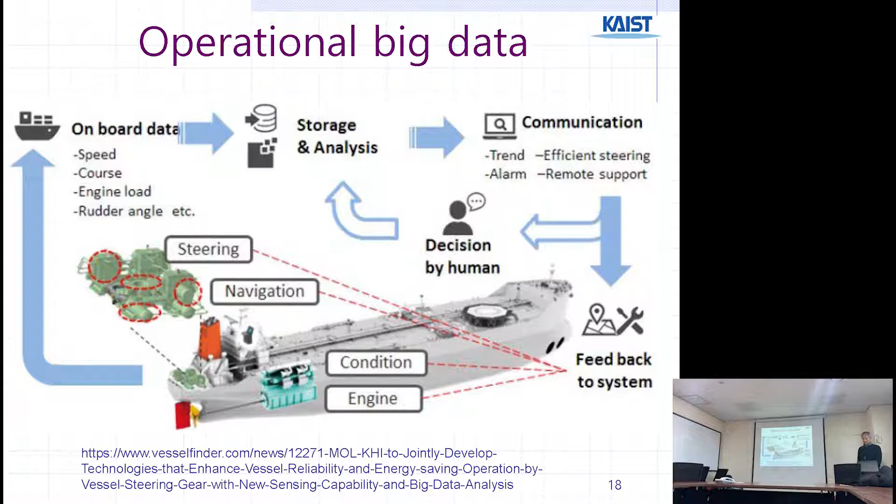You can do your own analysis there. So we call this operational big data, and it's important that you collect this. The technology behind this is sensors. Sensors detect information from the operating devices, and then it is converted into a digital signal and sent through the internet, wireless internet. That is the key component now.

Before, say, 30 years ago, there was no such device. There were analog devices, and for 100 years information was there, sensors were also there, but it was not converted into digital. The other new things are applications based on this big data. We call this edge computing and edge analytics.

Questions? No questions.

All right, moving on to the main topic, modular products. Take air conditioning, the air conditioner. This part is the indoor module, indoor. This is the outdoor module. But this should be one package, one manufacturing product coming from LG Electronics probably, or GE, I don't know. But it's a natural separation of modules, a natural separation of modules.

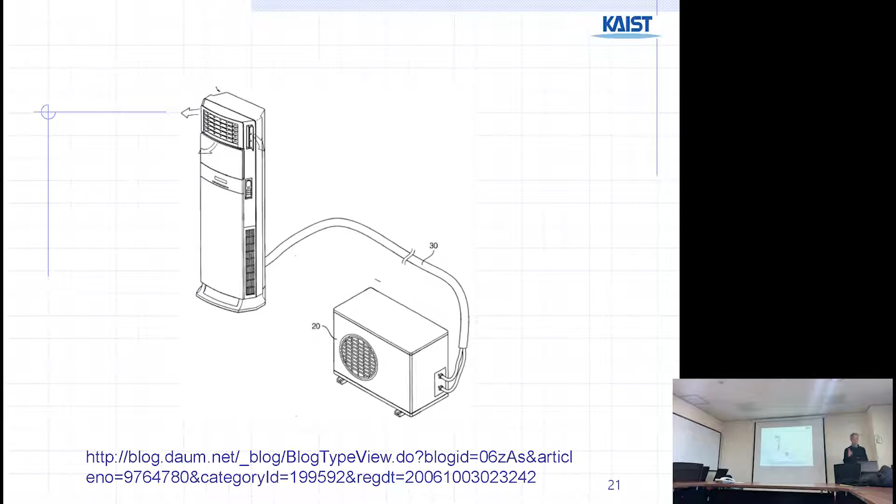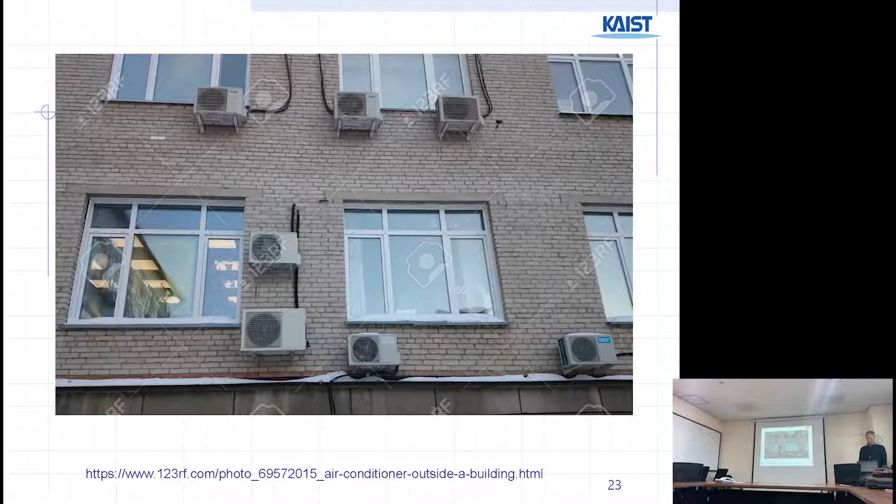Air conditioning, many. When I was traveling in Hong Kong, old buildings, all rooms have their own outdoor modules, very similar to this. Very interesting to me, because Hong Kong is a hot place. Old buildings don't have embedded modules. For modern apartments, you don't see such things, because they want hiding and a bigger integrated outdoor module. But in old buildings, it is installed later after the building is constructed.

So, a modular product. In LG Electronics, they are proud of their modular washer system. And I found most of the big product manufacturers, big products including car, ship, nuclear plant, airplane, construction industry, and even the software industry are using a modular concept. I myself am working on standards, ISO standards, and we are also talking about modular standards. So modular is popular, modular is popular.

Now, I explained about personalized production, not mass production, personalized production. And I also talked about smart service. What can be the relationship with the modular product? Modular product and personalized production, is it good or bad? Is the modular concept good for personalized production and also good for smart service, or bad for them? Probably because they are moving on to modular business, they are probably supporting this concept.

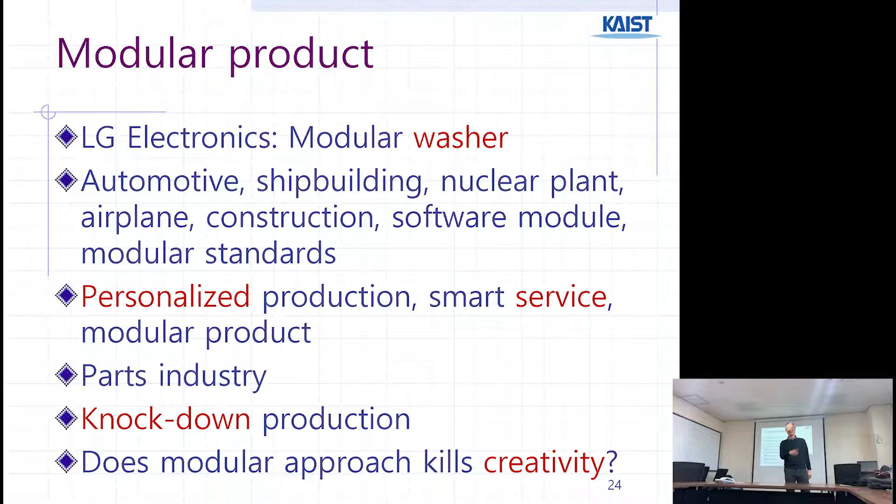Okay, let's see. Sorry, this is in Korean, but I'll explain in translation. This is the traditional way. So parts 400, parts 500, parts 300 gives you model A, model B, model C. Model A has 400 parts, model B has 500 parts, model C has 300 parts. So then you need to purchase all of them and also maintain them, storage and inside. Right? So it is the old way.

But now they have only 20 different modules. Combining them, module 4 gives you model AA, module 5, a combination of 5 modules gives you model BB, and a combination of 4 is model CC. And the purchasing department, quality control department - here they have more than 1,000 parts, here only 20 modules.

And then also you can provide more variations than this one. You can do it here, but you cannot do it because of this back end, right? Designers can do more variation, but it cannot actually be produced because it cannot be handled, supported by the purchasing and by the quality and others.

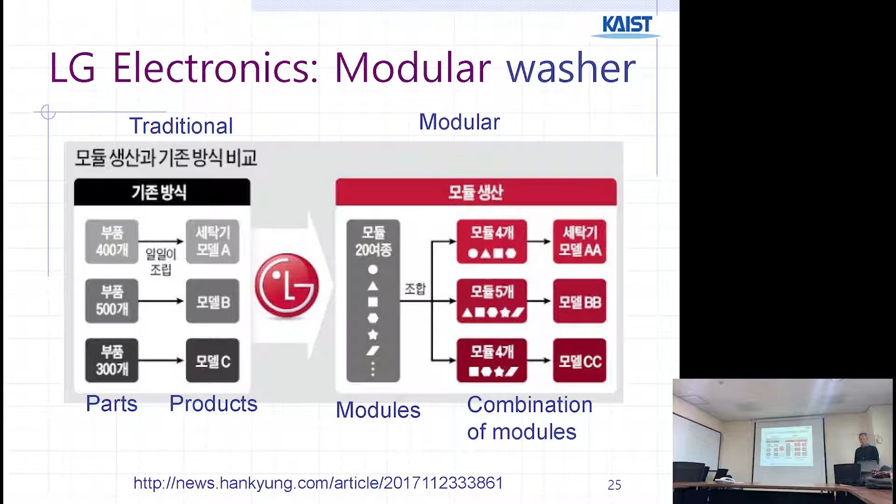And then also inside the modular architecture, the baseline most important module is the power module. It gives you more endurance and power, and problems come from here, right? This is the most important module. And they have only one kind of module among 20 - it is the most important one. They put many of, or half of, their engineering power into this module development. So it takes a long time to develop a new power module. It takes a lot of money to develop a power module. But customers do not rely on this power. They don't know.

Maybe they know there is a break, it doesn't work, and sometimes it is a problem, right? See, the appearance module is many, right? And functional means you have buttons, how many buttons, how many spins, or this is functional. So it is shown to the customer. So they select from using this and gives you 8, 6, 48.

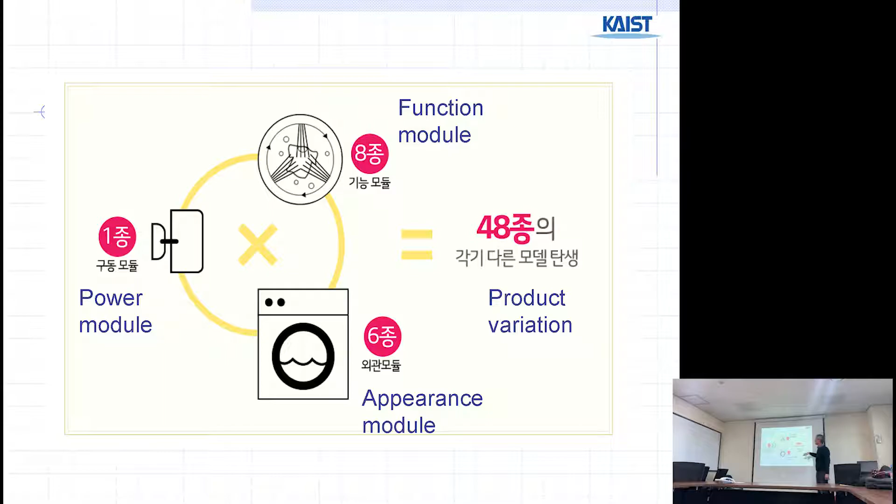This is a real number coming from LG Electronics washer. Right? So they separate out the marketing module from the engineering module. Right? And then what is good? You can produce this baseline module many. If you sell 1 million washers per year, if LG Electronics, then you can produce 1 million power module, same module. So you can achieve economy of scale, the money, and also in terms of quality, high level quality. Right? And this one is good for customers. Right? So that is the idea.

Automotive modules. Also, see, seat is important for customers, right? Leather or fabric, color, right? And inclined or warming, many, right? Many variations, right? But engine, brake system, you don't know.

I don't know about the brake system. When you purchase your car, you don't worry about the brake system, right? But it is important, right? Very important. But customers do not rely on braking. They do not check the brake system, right? So we call this a baseline power module, right? Power module, and then additional appearance modules. So they divide into this.

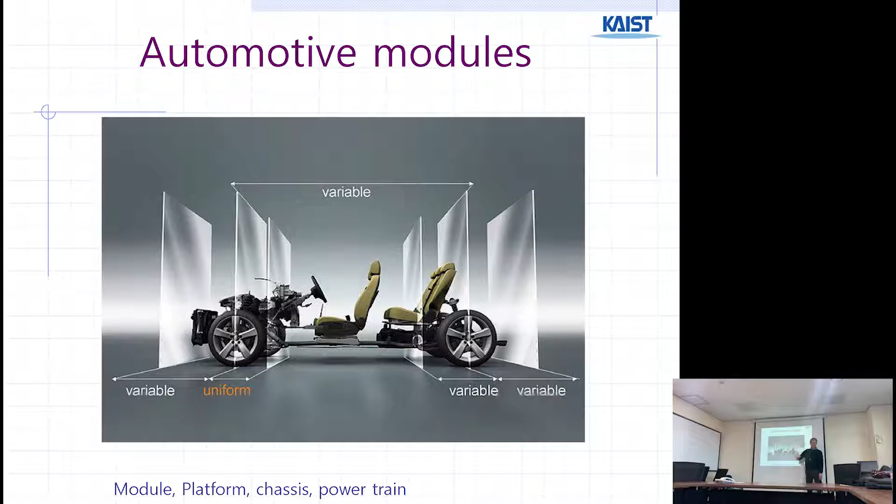Right, this one is also right. Car is made of upper body and platform. It's a platform. And platform is made of a powertrain, and powertrain is made of... see the powertrain, this one, no. Platform is made of powertrain, chassis platform, and then the others. It says powertrain is made of engine and transmission, and this is a body, underbody, that gives you strength, and suspension and gas tank, muffler, and that gives you platform.

But platform is most important for engineers, but customers, they don't know. They do not know what is happening. Right? They are more concerned about color, shape, right? What is the light angle, right? And also tire, and also seat, and audio system, air conditioning. That is important. So they separate out this.

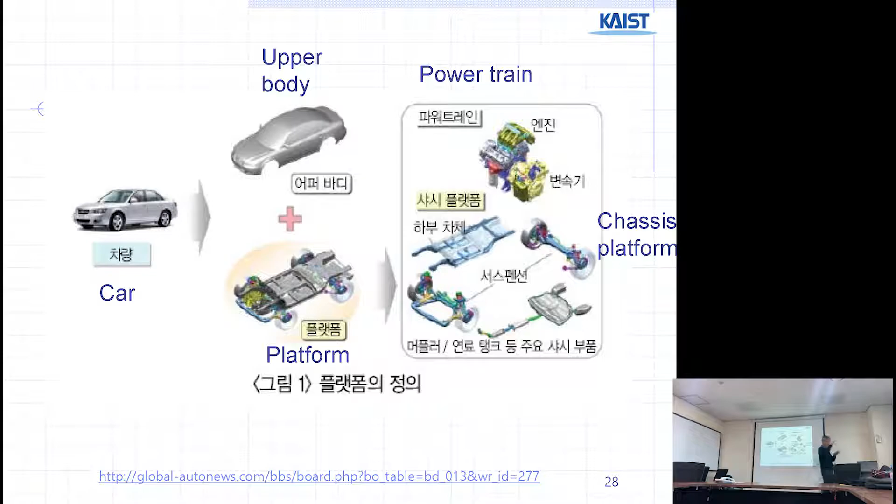So platform is evolution. Modular platform is new wording. So combination of smaller modules rather than bigger modules, smaller modules to produce platform and also variations. So they can, by using this combination and separation, share the same module among different car classes. Especially you remember the LG washer module. There is only one power module, right? That is important. So reducing number of platforms by sharing same modules, that gives you increased production numbers, not size of manufacturing.

And then, same again, economy of scale and quality control, right? It's good for the main part, main core part, core module. And then at the same time, you want to have more different variations in marketing purpose, options. That is not so important for engineering or safety, right?

Common platform. Sharing production facility. If you have a common platform for the car, this is platform, right? If you're sharing the production platform among different cars, then you can share also the production facility. For the LG washer power module, they are saying, it is my guess, they produce 1 million power modules. But all around the world, there are maybe more than 10 production facilities. So probably 4 or 5 factories really produce the power module, because you trade between transportation costs, right? It may be one in China, one in United States, North America, one in Europe, one in India, probably, right? Where the market is big.

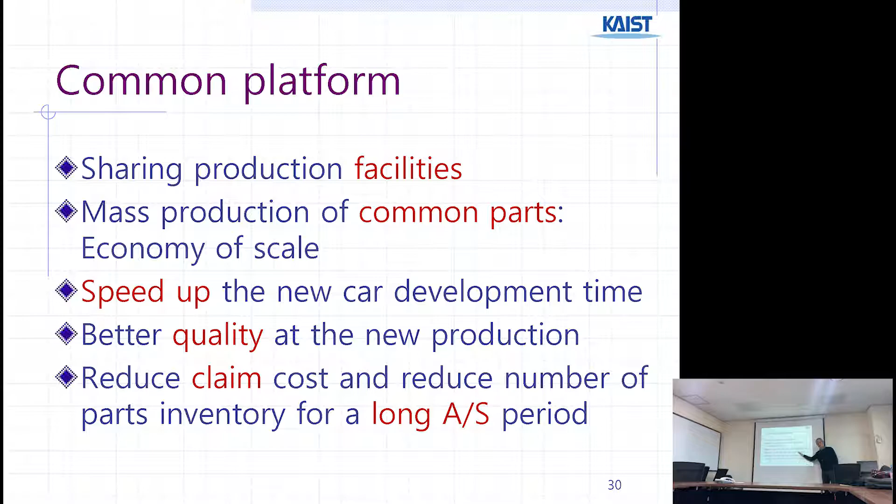Japan's case of after-service parts inventory: in 2000, it was the same as 20 years before. The number of cars produced inside Japan stayed at the same level for 20 years, right?

Because of many reasons. One is they developed new factories outside of Japan, similar to Korea, because their salary is going up and they want to make factories outside.

Another reason is the aging society. The population is reducing actually in Japan. Total population is already reducing, so that...

Production stayed the same as 20 years ago, but at the same time, the number of AS centers increased 4 times, because of competition, because of the law, and several other reasons. Anyway, this is a statistic.

Because the number of different car types increased over 20 years, and also law enforcement of 20 years means parts inventory should be maintained, that is the reason for this 4 times increase, same number but 4 times.

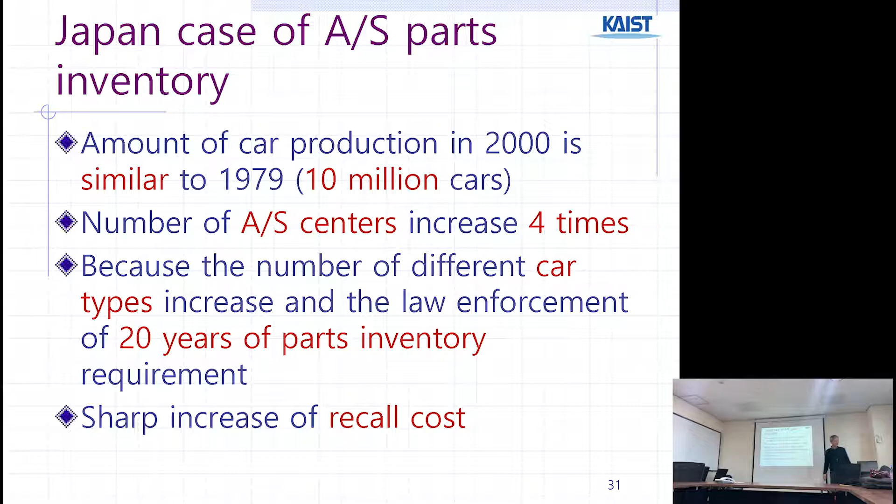Volkswagen's modular architecture, modular platform. In old days, they had a body and platform - upper body, lower platform, and then... what is it? Body and platform, platform.

There should be a number of modules or something, right? Oh, there is no modular concept here, right.

Now they changed it - today there are more modules that can be shared among platforms, so they have an increase of modules by more than 60%, common to all Volkswagen car types, not only one car. That's good for them.

So how can you design this car? As a designer, you should know about this modular concept, because you need to share parts for the new car - you need to put more common modules in the new car.

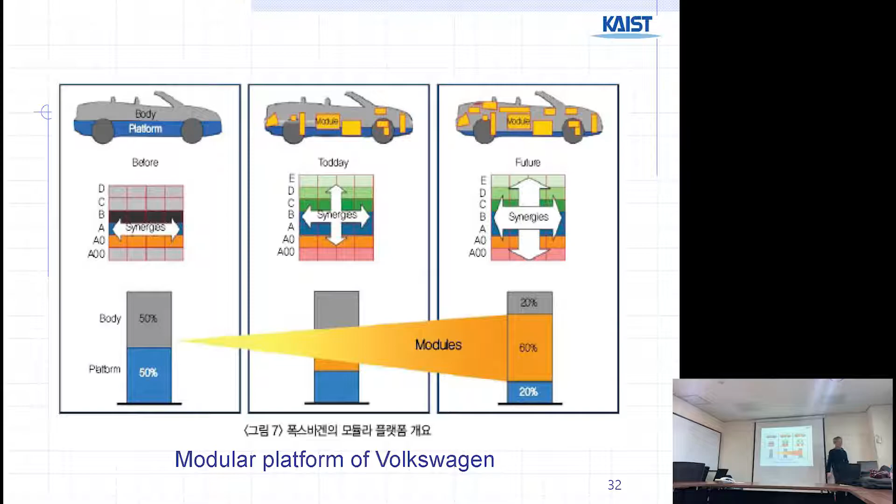The important thing is they are competing with each other to be the number one car maker around the world. Volkswagen sometimes, Toyota sometimes. GM is going down. Now Renault Nissan may be third, I don't know.

Common module family: 4 plus 1 big modules. Cockpit is the driving seat, like an airplane cockpit. Engine, electrical, electronic, front of the body, rear of the body.

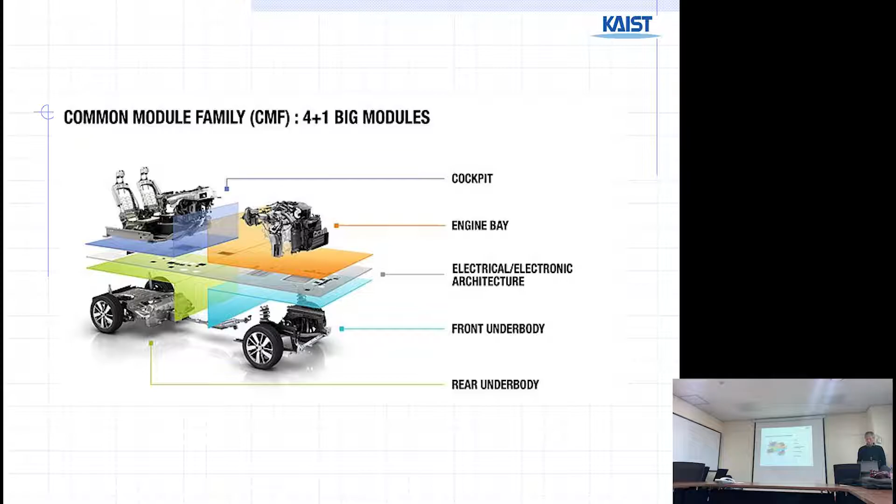There is another division of modular concept, and shipbuilding. Did I mention the ring block?

This is a ship. I chop it down into 10 pieces, and each piece is constructed outside, in China or another city, then they carry this mega block on a floating barge into the shipyard. Then a floating crane handles these big mega blocks and welds them into one ship.

Very fast - only 10 pieces, big, but only 10 pieces. You weld and finish. Very nice, right? This is modular architecture, right?

Modular - the problem is you need to handle all these pieces, electric, piping and other things already fixed and assembled there from China. You only need to combine them at the shipyard. Productivity is higher and construction time is reduced.

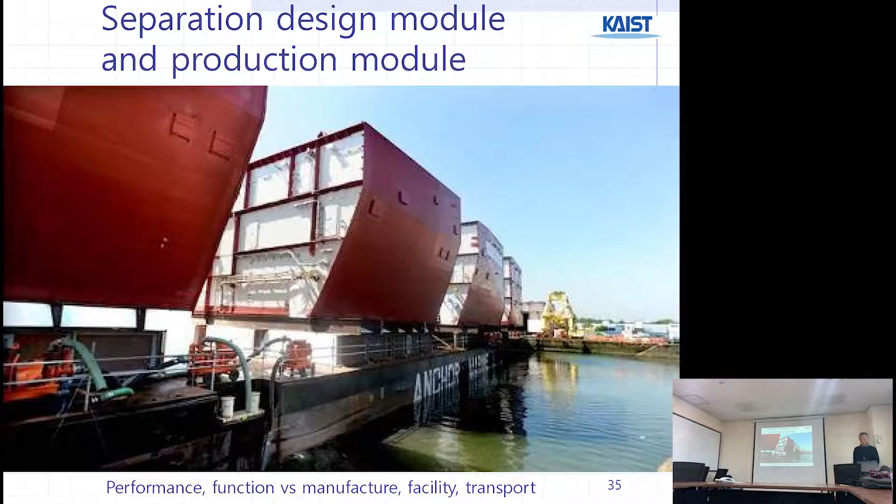Nuclear power plant. Korea. They are saying... celebration. Steel module, first time lifting something.

Why? Because it is an ocean. On land side, you cannot handle this. You cannot transport this. Transportation is the biggest problem. And also crane. If you want to handle a 10,000 ton crane at the site, it takes 6 months to build the crane, because it's a big hire. So it is not available on land side because of transportation, because of the crane.

But in ocean, you can do this. 10,000 ton blocks. So higher productivity than nuclear power plant, or airplane.

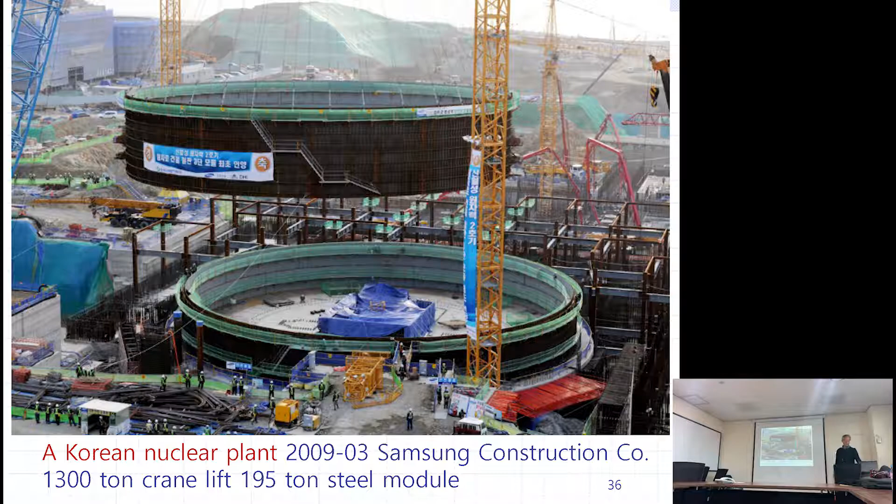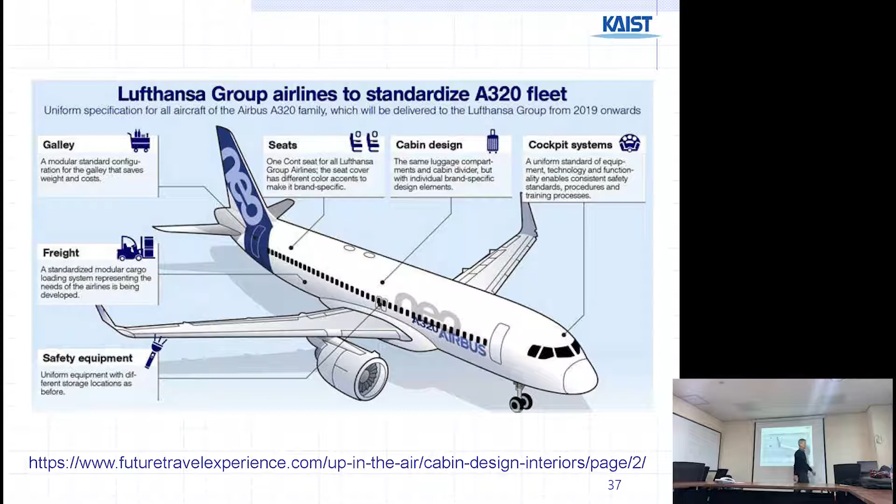This is a concept drawing, but anyway, this is similar. I have been to Boeing factory 2 years ago, in Seattle. Very interesting. The floor of the plant, big plant, is moving. Whole floor is moving, not a conveyor belt. This is a conveyor belt, and then on top, they build the airplane.

Finished, airplane is finished. And I asked, how fast is it? They are saying 1 day is 1 turn, so in 1 day they can assemble this. How can you do that? Modular concept, and modules are coming from, it was Boeing.

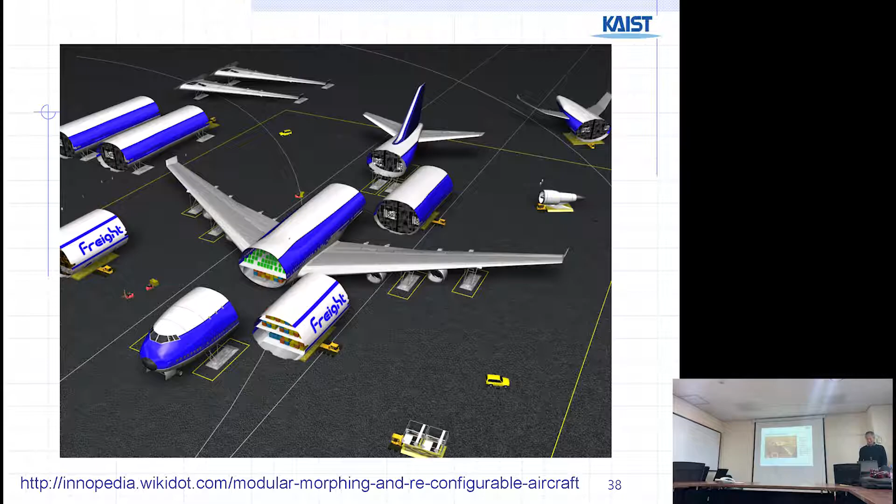Questions? No questions. Is time correct? No. The clock is also dead again. What time is it? I should finish up another slide set. 3:26, huh?

How many minutes do we have? Only 20 minutes. Right, and then I speed up. All right, we don't have a discussion today, eh? Oh, you have a discussion. I forgot this. Okay, no, 5 minutes and I'll finish.

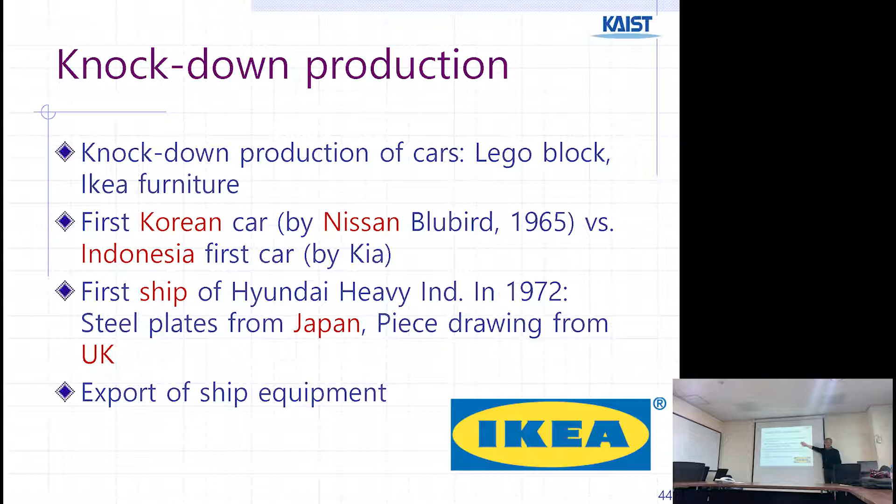Right, knockdown. Knockdown, IKEA, do you know IKEA? You can buy a set of any furniture, right? You can assemble this. A car also can be created in here. Modular creativity. Skip. Okay, question? No question.

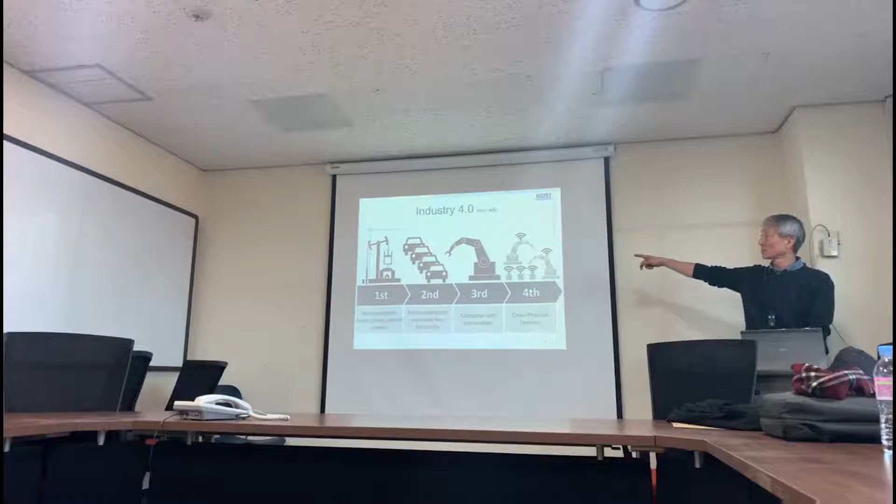Digital twin. Because the front part is almost the same, so I can skip over. You already know this from the wiki, right. What is the core technology? It was already old material. 2 years ago, AI was missing, digital twin was missing, CPS was missing, 3D printing was missing, and I'm working on standards, so I put more wording on this. Also, this is another 9 technologies of Industry 4.0, but I put digital twin and CPS because it was missing.

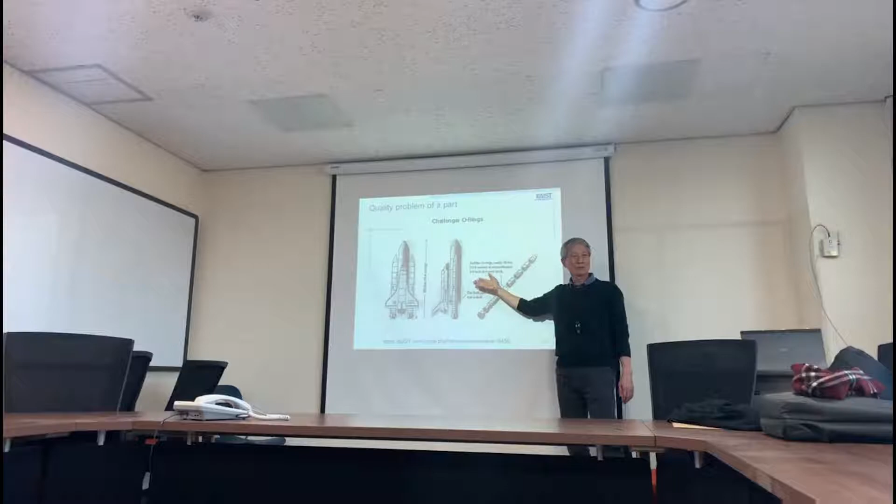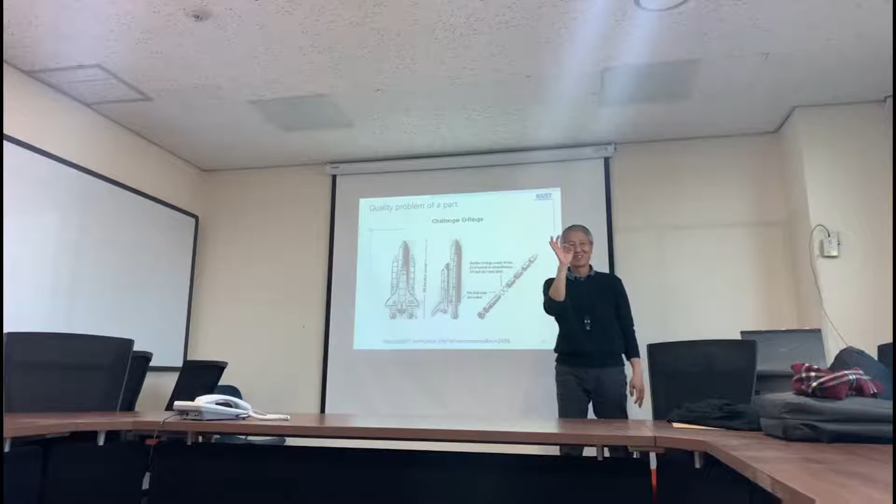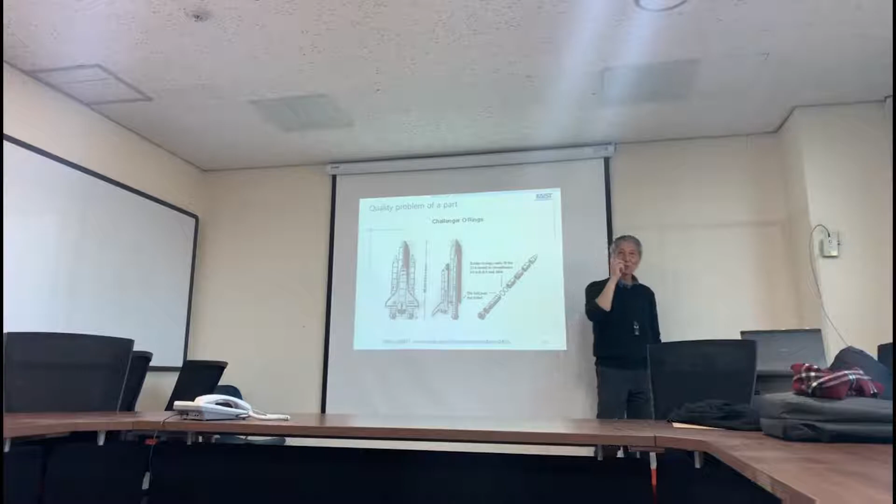Parts problem: Challenger, O-ring, created an explosion of Challenger. How many years ago? 20 years ago, probably, 15 to 20 years ago. Challenger exploded while launching. They found why: only one ring, O-ring, gave the problem. Leakage. So who made this? One small company down there.

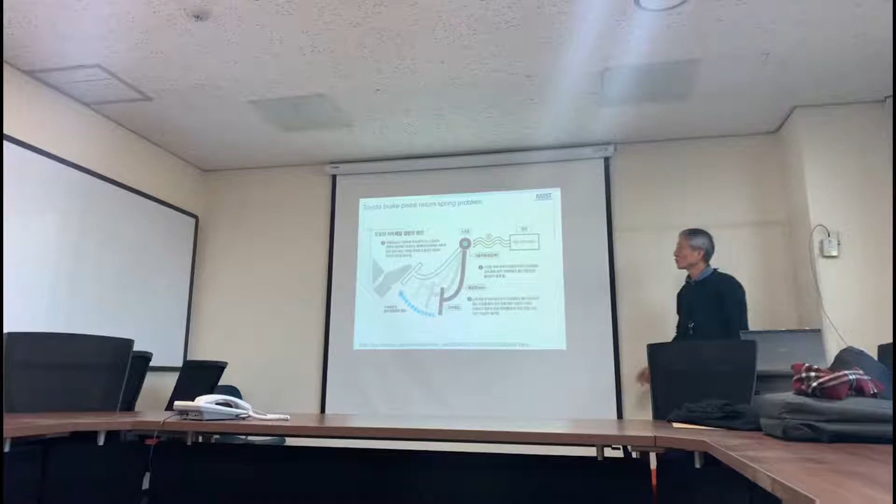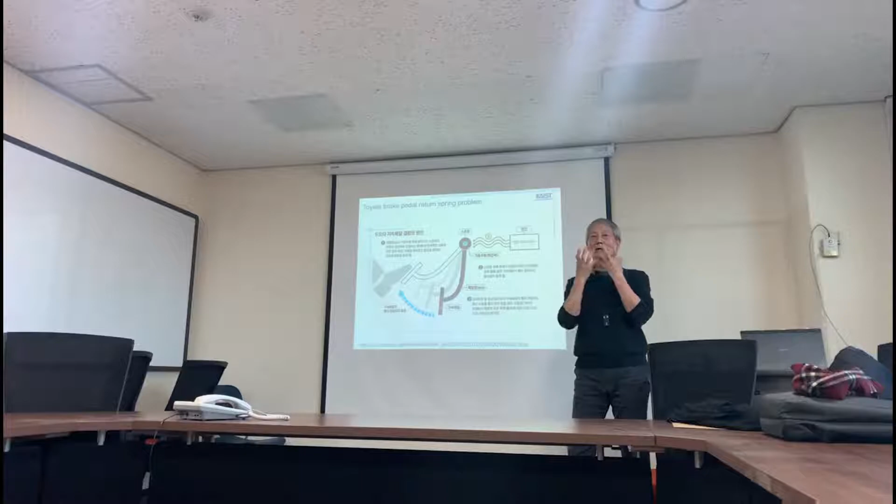Another one, Toyota. Probably 10 years ago, there was a big accident inside the United States. A policeman was killed, he was the driver, but he captured his voice while it happened. He is saying, brake is not working. And then he died. It was a big problem for Toyota, stock price. But the reason? One single spring.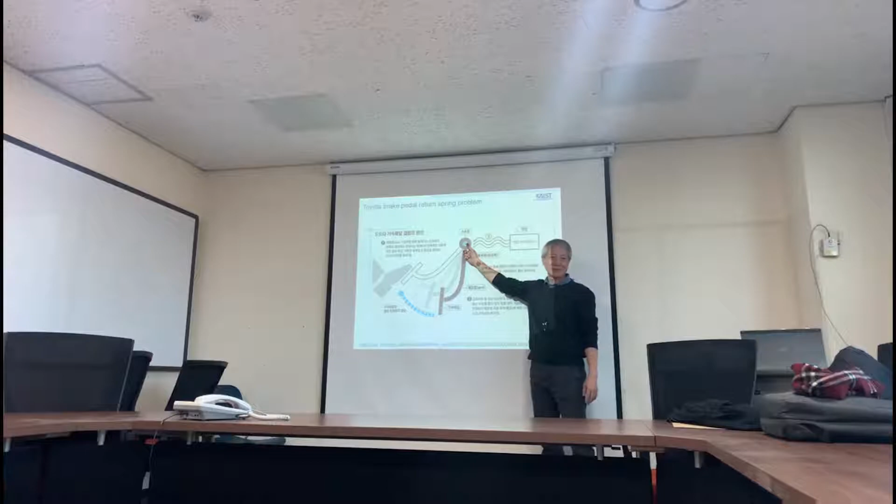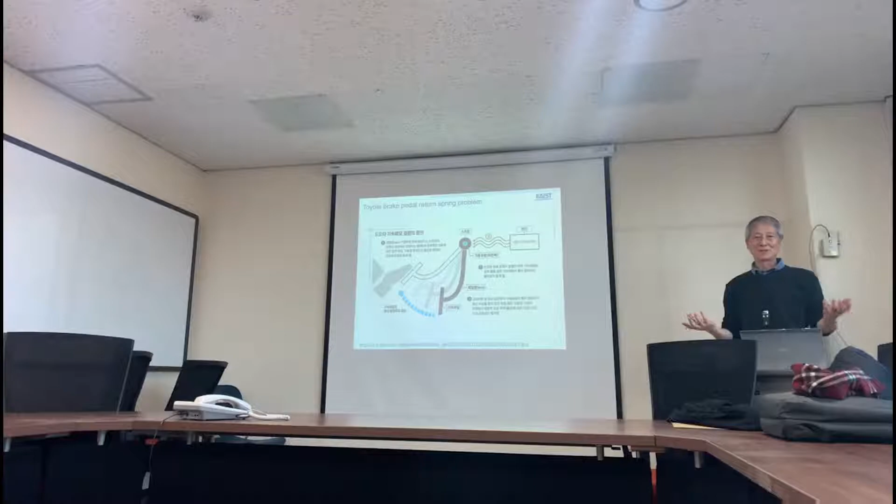Pedal spring was the problem. Braking was not. So who makes this spring? And what happened to Toyota? So parts is not simple. You need to have a very quality issue there.

This is another English site, so you can find more about the same Toyota problem.

And this is a nuclear plant inside Korea. There was a bribe so that they escape from the test, and the test report was wrong. The false test report for the parts of the nuclear power plant. So many people were jailed. It's about 5 years ago inside Korea.

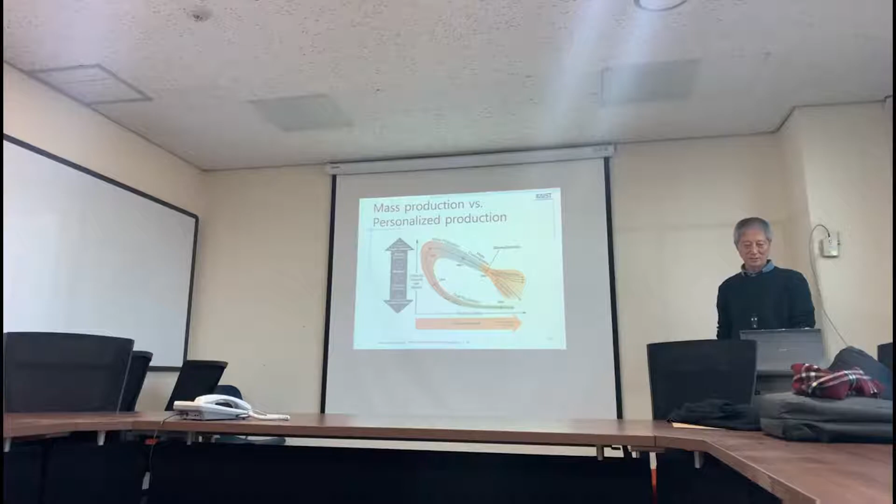So parts is important. Already shown this, you know this. Reshoring - they don't want to make factories inside China anymore. Outsourcing - now they return their factories into United States. Outsourcing, reshoring, not made in China, right? Speed factory.

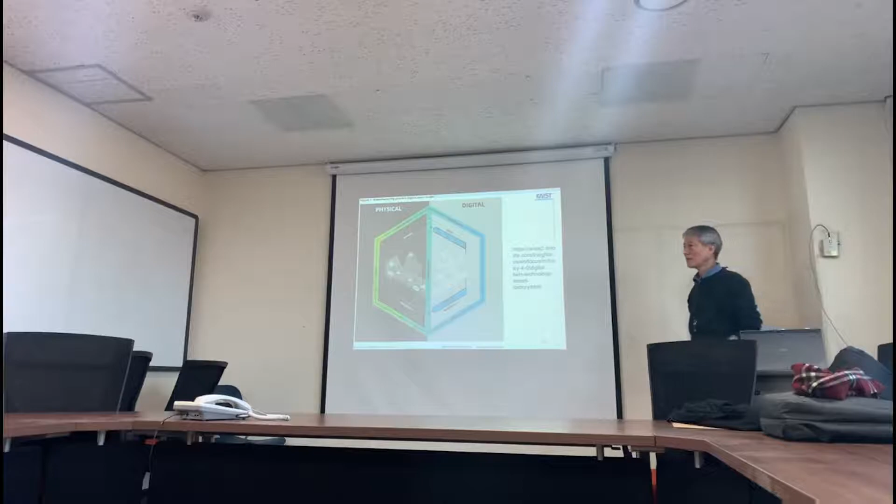Digital transformation. Discussion. Digital twin. General Electric. Wind power. Videos of wind power and also ocean plant. So there is a twin, right? Digital and physical. I also already showed this diagram before. Physical and digital - we call it digital twin, but there are component technologies.

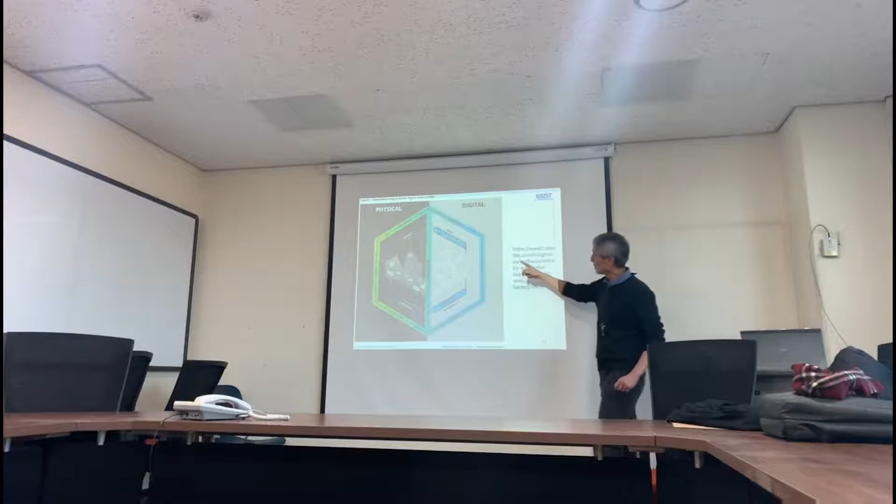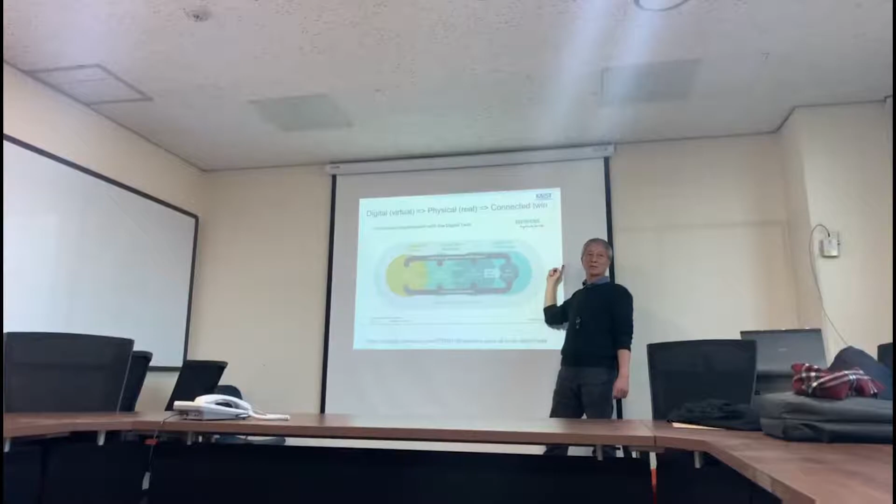Definition from Deloitte consulting company. Core technology: sensors and data. It is coming from Siemens, but it is a timeline - real product. You start from only virtual, digital, no physical, arriving at physical. But then you can have a twin there. Operational time, twin - here, no twin.

Operation - right, because it's a complex nuclear power plant, airplane, you don't know how it is operated. So you need to have a collection of operational data using IoT.

Same as - so digital twin. In old days, 10 years ago, 5 years ago, why was it not available? Because of the cost of computing, cost of storage, and also bandwidth of wireless or telecommunication. Now it is solved by smartphone, GPU, memory chip, IoT, 5G mobile.

For video, film, you need only 3 megabits per second, then you can play film on your smartphone. But now they are saying gigabit per second, 5G. How many times more? 300 films at one smartphone, in real time. Very fast.

First topic is design and reducing parts. In modern time, as technology develops, there are many complex machines. In general, when the machine is complex, the number of parts is increasing. But the increasing parts cause many problems. First, there is difficulty in manufacturing and difficulty in O&M operation and maintenance, and it also causes increasing weight. So the machine has low efficiency because of high weight.

So for complex machines, for example aircraft engines, robots, ships, or plants and so on, in the assembly stage engineers try to reduce the parts. So this is Jiman's video about a wind turbine, about a direct drive generator.

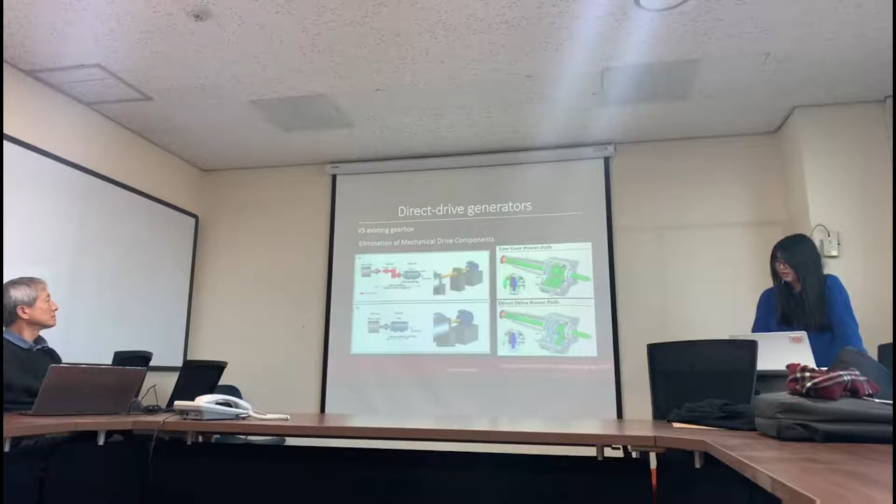Having a new technology where we are in the front. We have revolutionized the whole wind market with this new prototype that we have installed. Yeah, even my children say that your windmill, Dad, because I've been seeing that more than them. It is the way wind turbines will be made in the future.

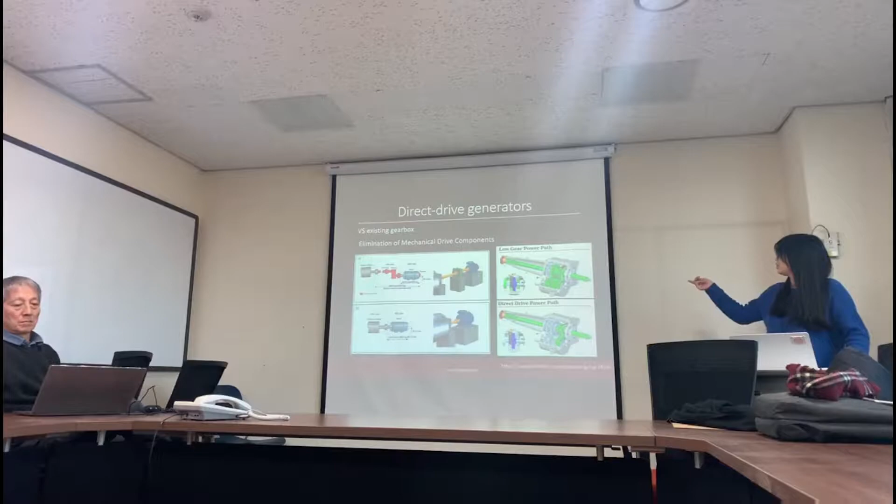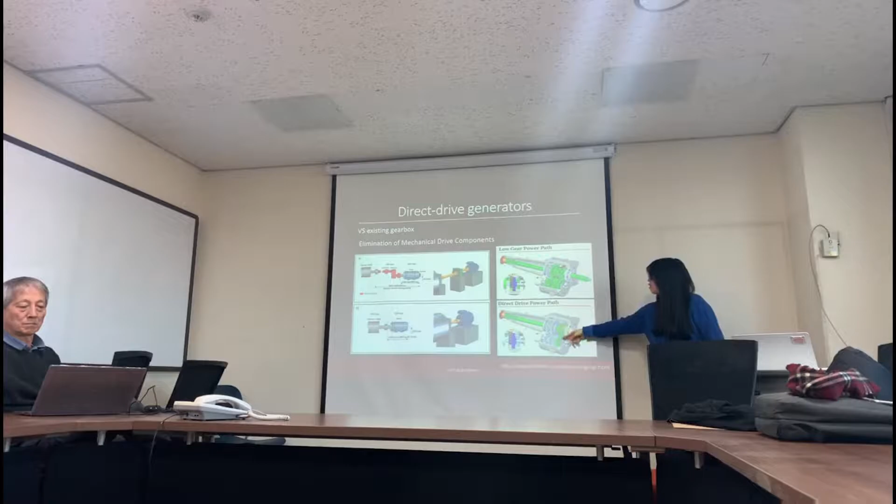This is one of the most - this is a direct drive generator. Comparing with the existing gearbox - in general, wind turbines use a gearbox, but the direct drive generator is proposed to eliminate the mechanical drive component. So this is the gearbox, they use many gears, but direct drive power only uses this part, so we can remove the part.

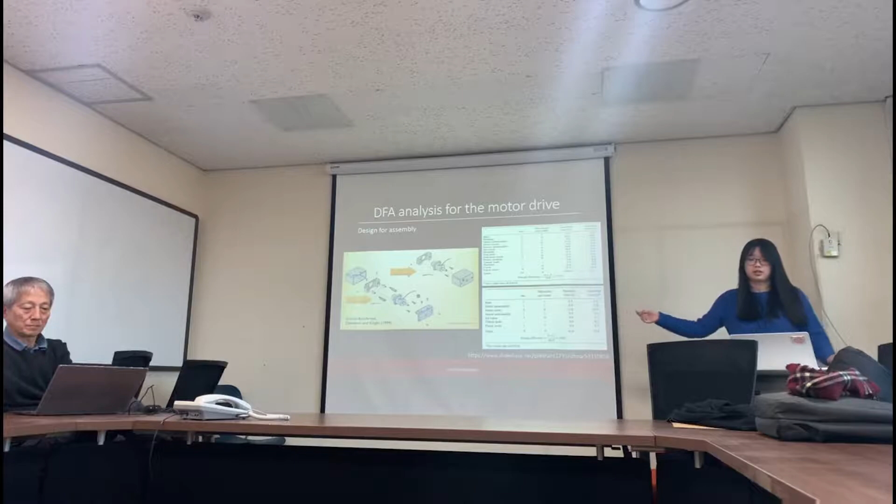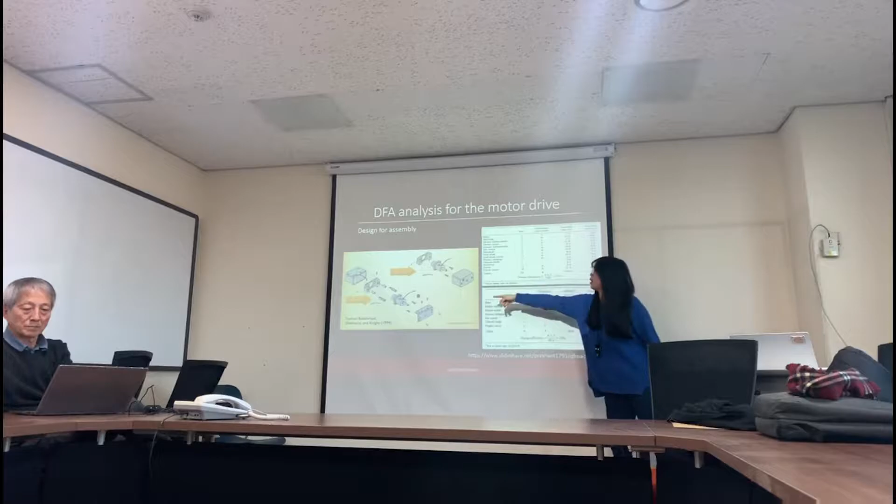This is the DFA analysis, designed for assembly. To increase the efficiency of assembly, they use the analysis about assembly. This is about a motor. They calculate the design efficiency and analyze whether the assembly is good, comparing the original assembly and redesigned assembly.

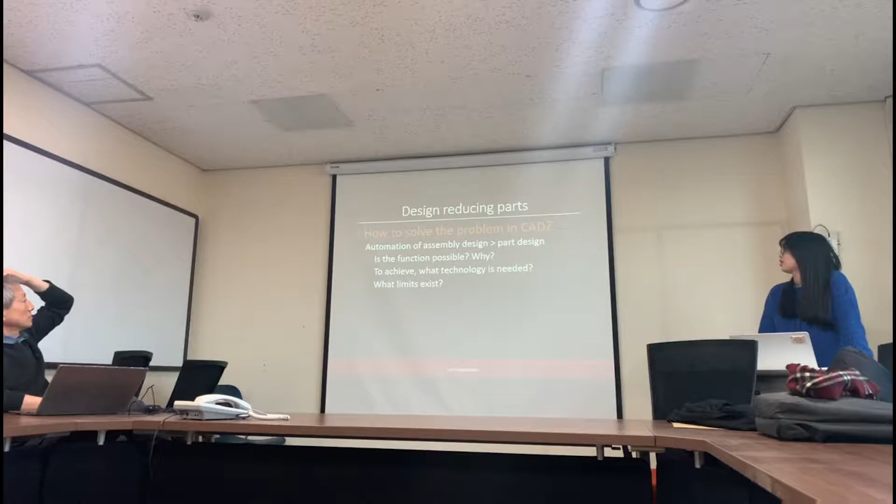So how to solve the problem in CAD? The idea is that after assembly design, CAD provides the optimized version of assembly. So there are three questions: one is whether the function is possible in CAD system, and why; second is to achieve the function, what technology is needed and what limits exist.

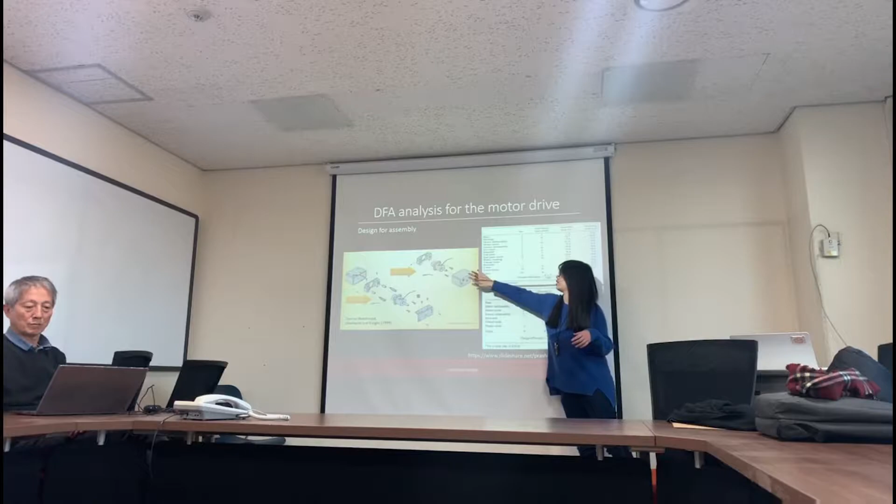I have a question. What do you mean by simplified assembly or optimized assembly? I think when we have the original, we can assemble in CAD, and we optimize in CAD. We get the redesign - optimized for design. Yes, optimized assembly design.

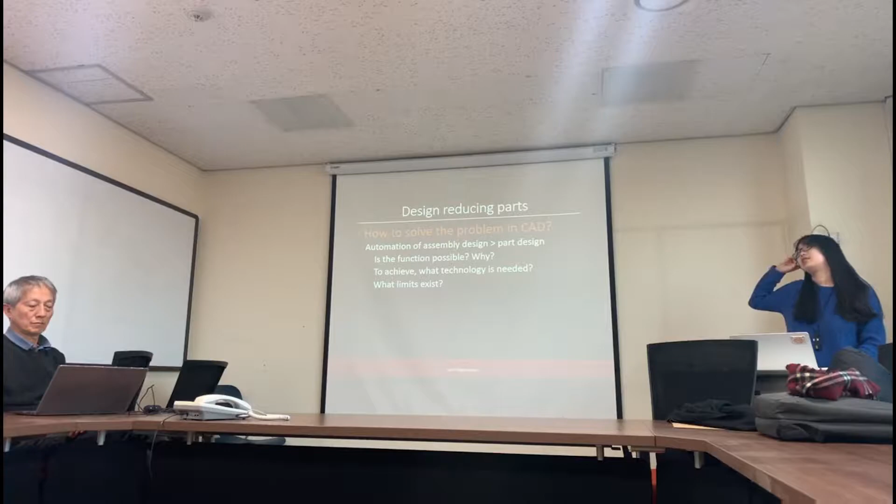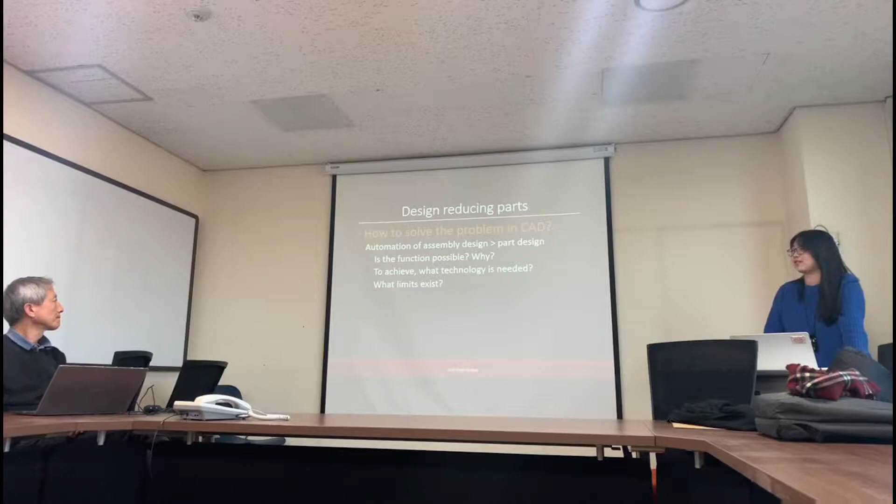It can approach to part level. Actually, the different concern is that if you make your design modular, then there may be an increased number of parts in the assembly. But when there are fewer parts, then your design is less modular to some extent.

Using a generative design approach, we can create complex shapes. But making those shapes is difficult, expensive, and has high risk compared to an engine developed with simple parts.

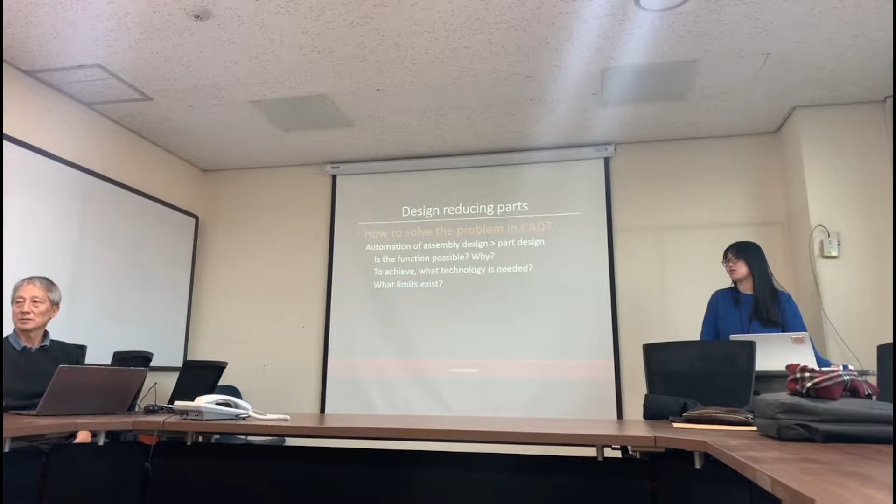Anyway, in any optimization, you need to see what is the objective function - number of parts, cost, weight, performance - depending on the objective function, the original design... the objective is about this design efficiency.

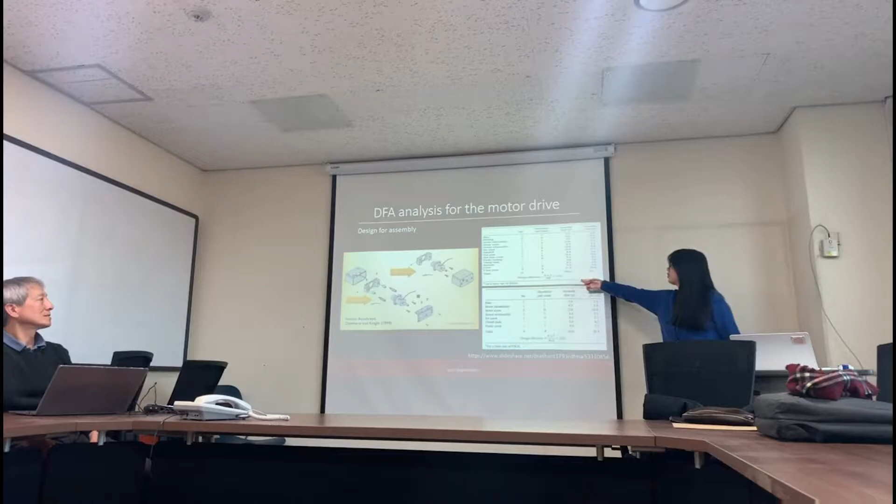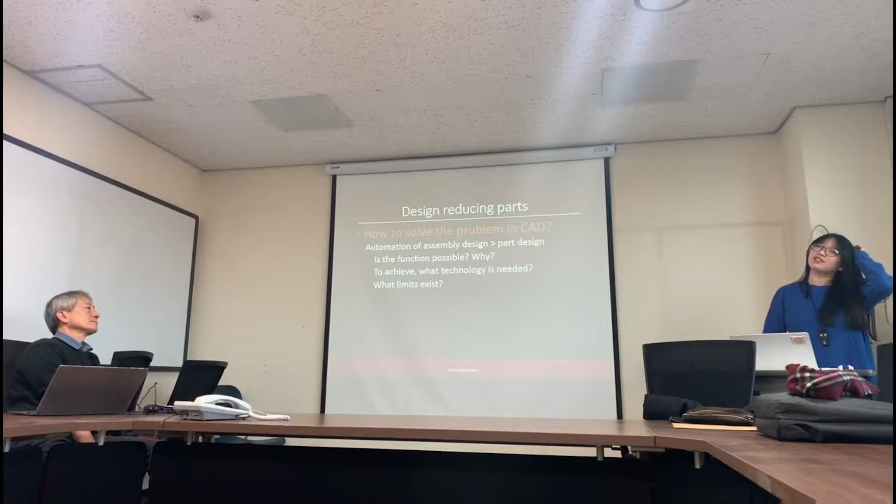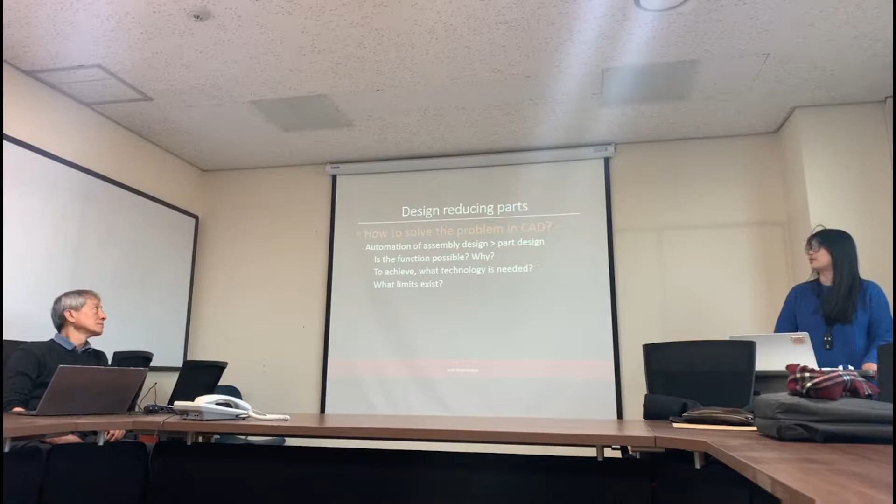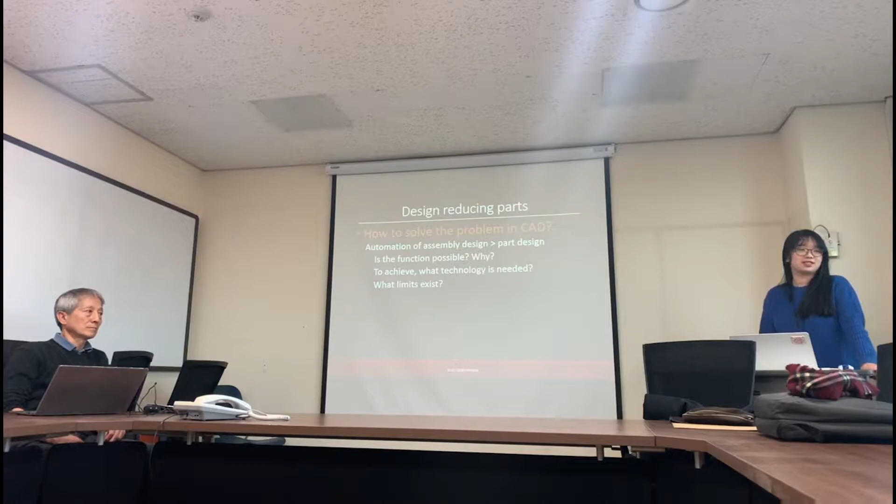So basically, just combining multiple functionalities that different parts provide into one part, something like that. It can be. And for that case, maybe there needs to be a clear definition of what function the part needs to fulfill. So maybe the engineering must define the priority of assembly function.

Any other? The second topic is design and optimization. I think it is at a part level. To improve a product, we must do optimization of part design. Its purpose is to fulfill design function and increase efficiency. For example, lightweight is one type of optimization, and in general, topology optimization is used.

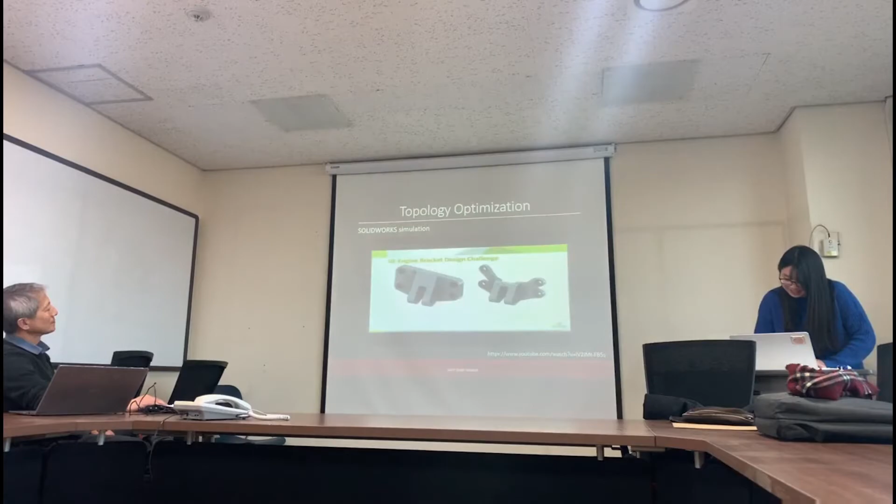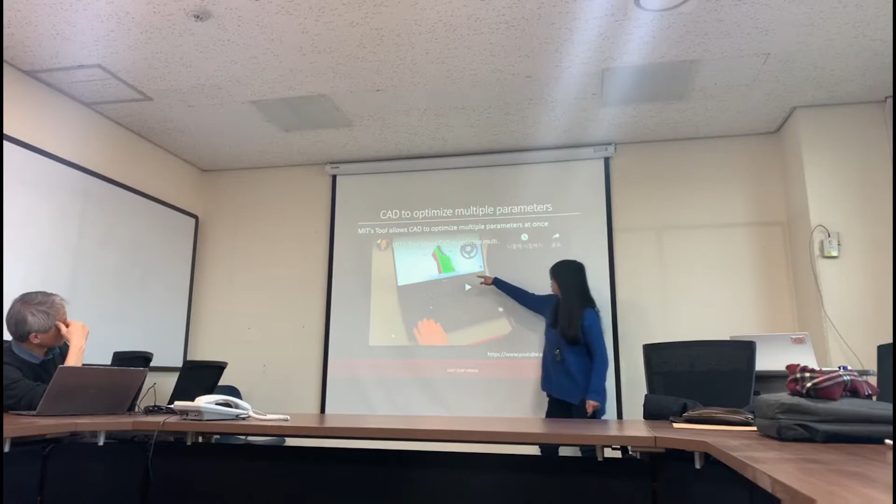I'll simply explain. There are mass or length, so users can control the parameter, and automatically the part design is changed. So this is my subject.

When I saw the MIT research, I thought that part optimization can be applied to customization, where a customer can design a product by controlling the parameters of the product the company provides. It's similar to options, but I think it can be a deeper level of design. So my question is, in what industry can this be used, what parameters can be used at the consumer level, and are there any possible manufacturing problems?

Use 3D printing when we want to reduce the volume of the piece so we have the optimal printing time? Yeah, it's possible, I think.

I think personalized design cases will help the consumer with this kind of thing. A consumer can check his or her model at a very basic level and suggest a personalized product, but there can be some restrictions with respect to manufacturing. So the company can limit the parameters considering manufacturing.